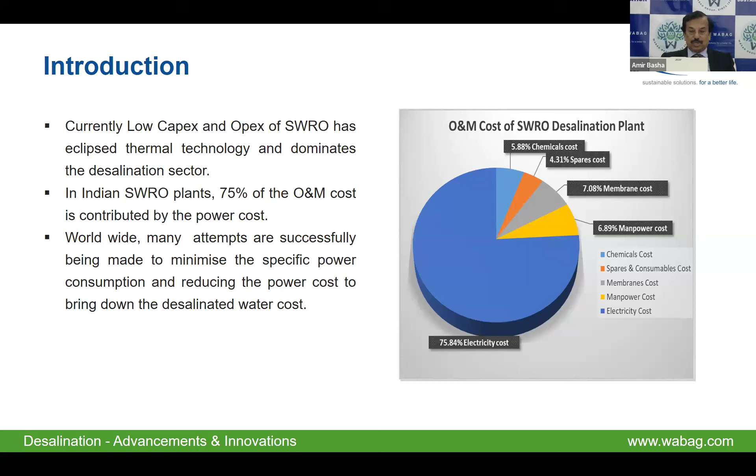In the world's largest desalination market, which I call the Gulf region, desalinated water prices have largely hovered in the range of 0.4 to 0.55 US dollars. Hassyan IWP in Dubai was awarded to the ACWA Power bidding team at a levelized water cost of 0.37 US dollars per meter cube. However, these prices are based on an RO process energy consumption of around 2 kilowatt hour per meter cube, and also the electricity cost in the Middle East is much lower than Indian power costs.

These prices are based on the RO process energy consumption of 2 kilowatt hour per meter cube. There may be some plants operating at a higher kilowatt rating depending on the type of energy recovery devices and membranes available there.

The theoretical minimum energy for desalination of seawater with a salinity of 35,000 milligrams per liter is approximately 1.07 kilowatt hour per meter cube at 50% recovery.

Nevertheless, the practical thermodynamic limit of seawater reverse osmosis in terms of specific power consumption is about 1.6 kilowatt hour per meter cube for desalting seawater of 35,000 ppm with 50% recovery. Hence, there is still a margin to squeeze the specific power consumption of the desalination process.

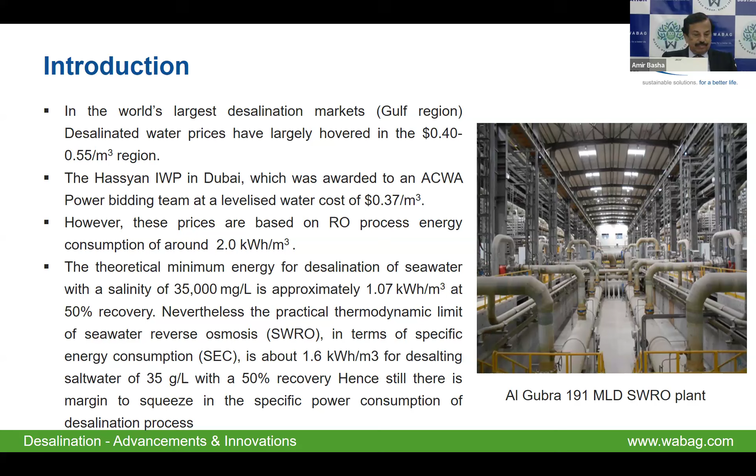There are a lot of innovative ways to reduce the energy consumption of the SWRO process. The first is improvements and developments of RO membranes. New RO membranes are being developed which will have higher flux at given pressures. Higher flux means higher flow, or higher permeate production in a given area.

So Aquaporin is developing new membranes. There are carbon nanotube membranes as well. These membranes, at a given pressure - that is, the current operating pressure - can produce more permeate. There are other research and development processes going on simultaneously at many locations.

Improvements in efficiency of all energy-consuming equipment are also being attempted simultaneously by going in for higher capacity units. Higher efficiency pumps are being brought in, along with higher efficiency energy recovery devices.

The yellow item you see here is a pressure exchanger made by ERI, Energy Recovery Inc., which has an efficiency close to 97 to 98%, compared to the Pelton wheel shown slightly above in blue, which had an efficiency of around 85 to 86%. On the right side, you can see a turbocharger with an efficiency of 88%. So there were continuous developments going on in energy recovery devices to recover the brine energy getting wasted.

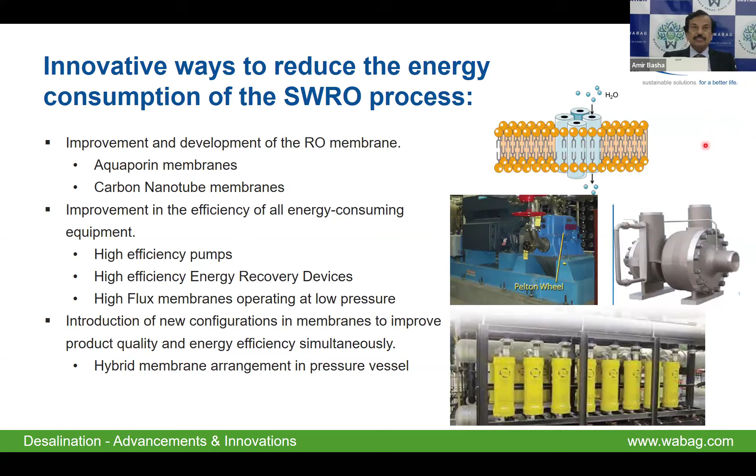Then there is the pressure center design. In normal RO plants, each RO train will have a high pressure pump, energy recovery device, a booster pump, and the membrane arrangement.

Whereas in the pressure center design, all high pressure pumps are joined together in a common place, all booster pumps are joined together at one place, and energy recovery devices are commonly placed, so that the size of the pumps is big and we can achieve an efficiency of around 90 to 91%, so that the specific power consumption can come down.

This has already been tried in some plants in Israel. And elimination of the break tank, which we call inline design, means there will not be any break tank between the pre-treatment system and the RO system. Because of that, there will not be any energy loss, which improves the specific power consumption of the plant.

Reduction of additional energy consumption by mitigating membrane fouling. In RO plants, a major problem is membrane fouling or scaling, which can increase the pressure, and because of that the power consumption will become high.

Introduction of DAF, dissolved air flotation system, biocide dosing to take care of biofouling, and use of low fouling membranes has brought down this energy consumption to a greater extent in modern plants.

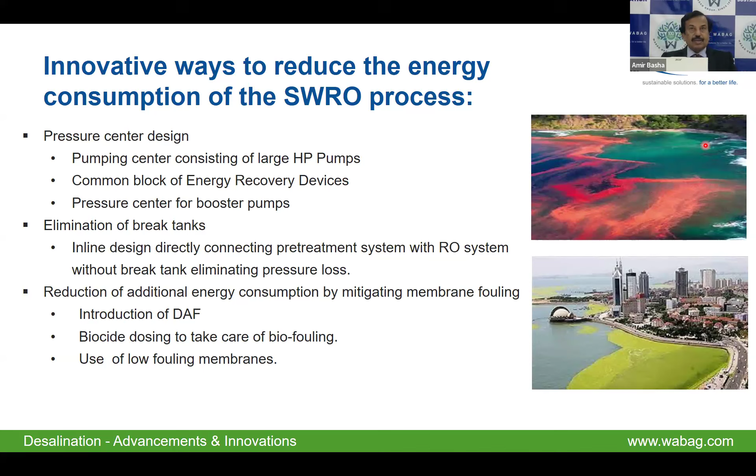Optimizing power, chemical consumption, manpower, and resource allocation with artificial intelligence and digital twinning has also considerably reduced energy consumption in RO plants.

I just wanted to bring up a breakthrough which has happened recently in desalination, a new concept. MIT scientists have discovered an astonishing phenomenon called the photomolecular effect, where light can directly cause water to evaporate without the need for heat, potentially leading to a significant increase in evaporation rates compared to traditional methods relying solely on heat. This breaks the thermodynamic barrier in thermal desalination plants. We have to wait and watch how this is going to take shape.

Then, byproducts and downstream integration with green hydrogen production, mineral mining from desal plants are also going to make SWRO plant water production costs more attractive.

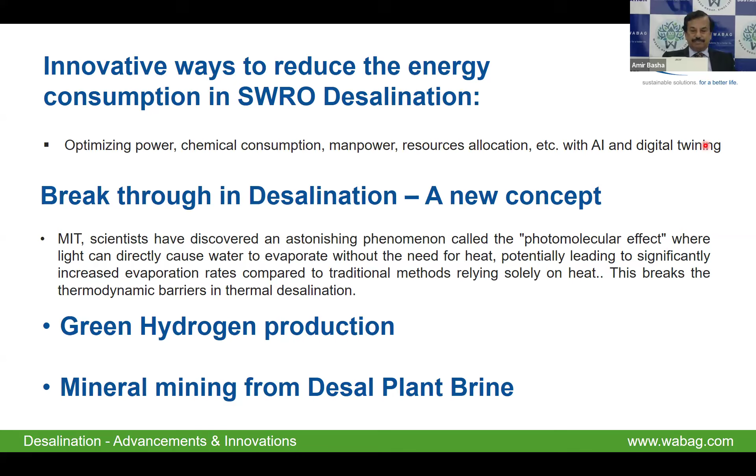Predictive maintenance with AI. AI is being used to predict equipment failures and maintenance needs in O&M projects. By analyzing historical data and real-time sensor information, AI algorithms can identify potential issues before they occur, reducing downtime and optimizing asset performance.

In these plants, reducing downtime has a great advantage, because every time the plant is shut down and started up, we have loss of energy and loss of production. So if a plant can run without any downtime, its plant load factor becomes higher and the operating cost comes down.

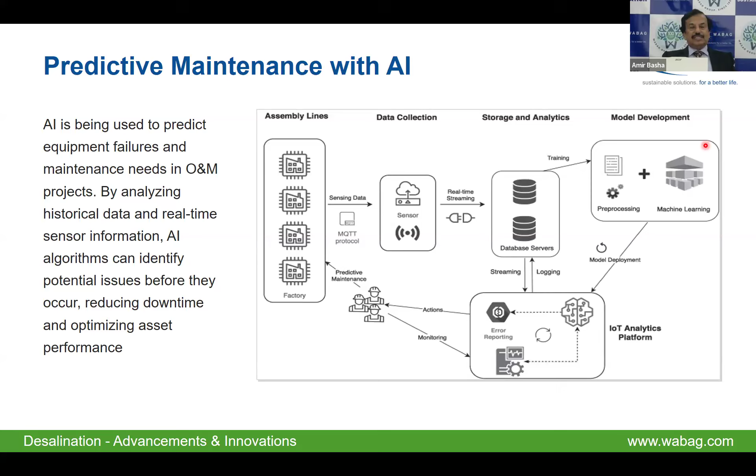Optimizing resources also by AI has given good leverage. AI-driven optimization algorithms are used to allocate resources efficiently in EPC and O&M projects. This includes workforce scheduling, equipment utilization, and material management, leading to cost saving and improving the project timeline.

So project timeline saving is also a saving in manpower cost and project cost, resulting in a lot of savings. So the capex comes down with use of AI to optimize resources.

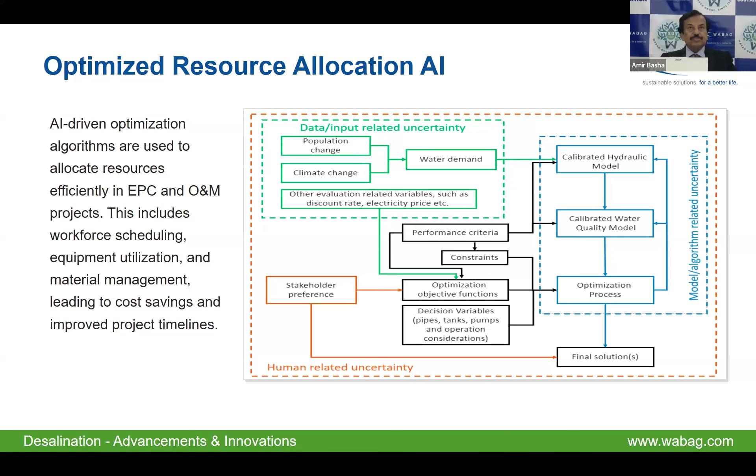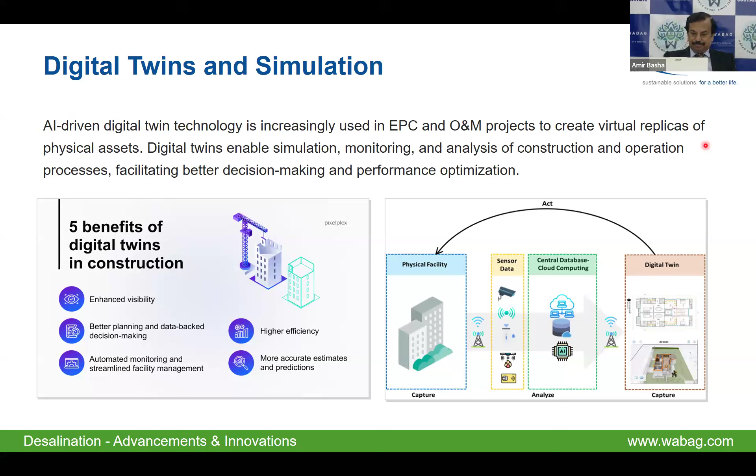Another main attempt being made is reducing energy cost. You may recall that 75% of SWRO O&M cost is in power consumption and power cost. So most desalination plants worldwide are supplied power generated from fossil fuels, and the power tariffs are very high.

So if we can go in for cheap renewable power alternatives like solar energy or wind energy, which has been successfully implemented in some desalination plants, it will drive O&M costs downward considerably by reducing the power tariff. Al Khafji in Saudi Arabia has a solar SWRO plant with a capacity of around 60,000 cubic meters per day, which is currently the largest solar desalination plant now.

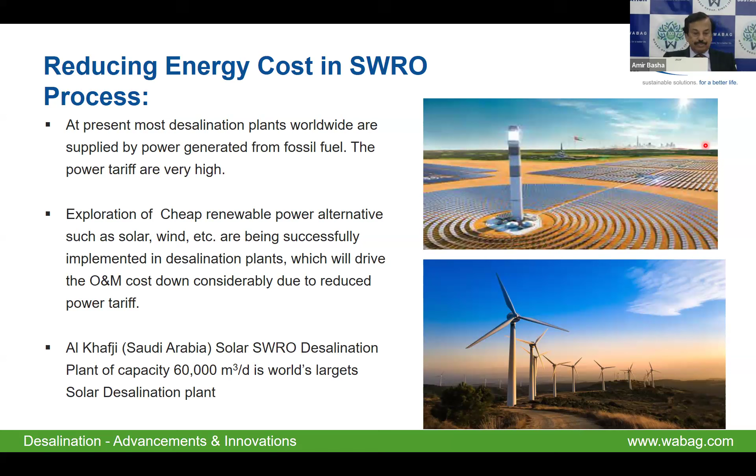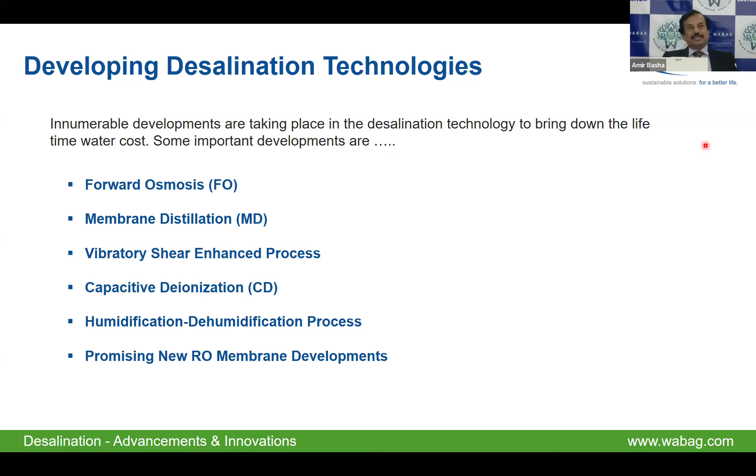Innumerable developments are taking place in desalination technology to bring down the lifetime water cost of desalination plants. Some important developments include forward osmosis, membrane distillation process, vibratory shear enhanced process, capacitive deionization process, humidification dehumidification process, and promising new RO membrane developments. Because of paucity of time, I'll explain a few of them so that some interesting features can be known to the audience.

Forward osmosis is an osmotic process. It uses a semi-permeable membrane to separate salt from water. It uses the osmotic pressure gradient instead of the hydraulic pressure gradient used in RO plants to create a driving force for water to transport through the membranes. No energy is needed to drive the water flux. In RO plants we use a pressure of around 58 to 60 bar to force water through the fine pores in the RO membranes, whereas in forward osmosis, it is driven by the osmotic pressure gradient. No extra force is required for the water, and the water flux is also higher.

It is an innovative membrane-based technology with potential to reduce the cost of the plant as well as environmental impacts in desalination. Forward osmosis is nothing but when you separate a feed and brine, due to the osmotic difference in the gradient, feed water will go towards the brine to dilute it to achieve equilibrium. So this is forward osmosis.

Whereas in reverse osmosis, you apply a force in order to have pure water molecules pass through the semi-permeable membrane and reach the other side.

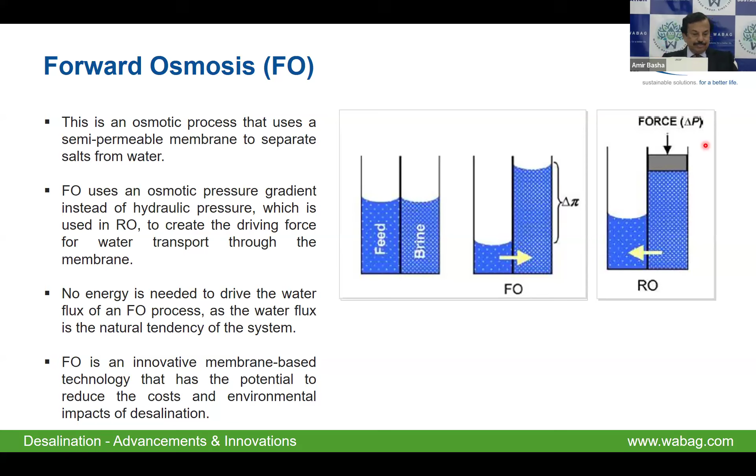In forward osmosis, a concentrated solution, called the draw solution, is the source of driving force. A selectively permeable membrane allows passage of water but rejects solute molecules and ions. The osmotic driving force in forward osmosis can be significantly greater than the hydraulic force driven in the RO process. This results in higher potential flux rates and recovery. The selection of an appropriate draw solution is a key factor in the performance.

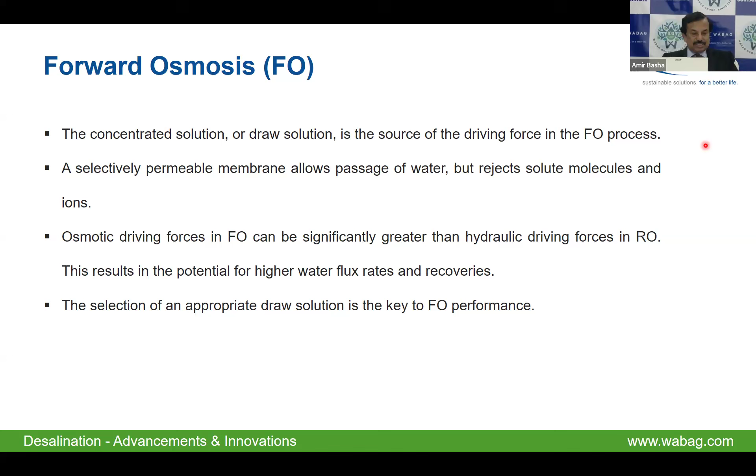The picture shows a pilot arrangement for a forward osmosis system. The blue hatched area shows the saline water entering the membranes, and the green area shows the draw solution. Because of the concentration difference, pure water molecules from the saline water pass through the membrane and dilute the draw solution. This draw solution is taken to another tank from where it is sent to a recovery system where the pure water from the draw solution is separated and taken out. So the process is very simple—it does not need any high pressure pumps to drive the process.

This process has high osmotic efficiency, and it's important that the draw solution should not be toxic, so that even trace amounts going into the produced water should not affect it and should be acceptable. The draw solution should also be chemically compatible with the membrane being used. Some draw solutions used are magnesium chloride, calcium chloride, and even sucrose can be used as a draw solution.

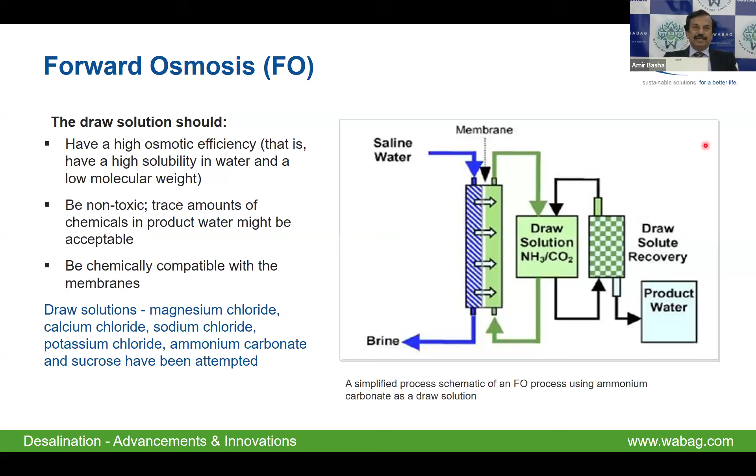Hydration Technology Innovations is a company which produces an emergency sugar drink that can be made from contaminated water simply by placing a pouch fabricated from a selective permeable membrane in the available water. The sugar solution inside the pouch has high osmotic pressure, and over time clean water flows from the contaminated side to the sugar side to produce the energy drink. Similarly, other innovations are being made using the forward osmosis process.

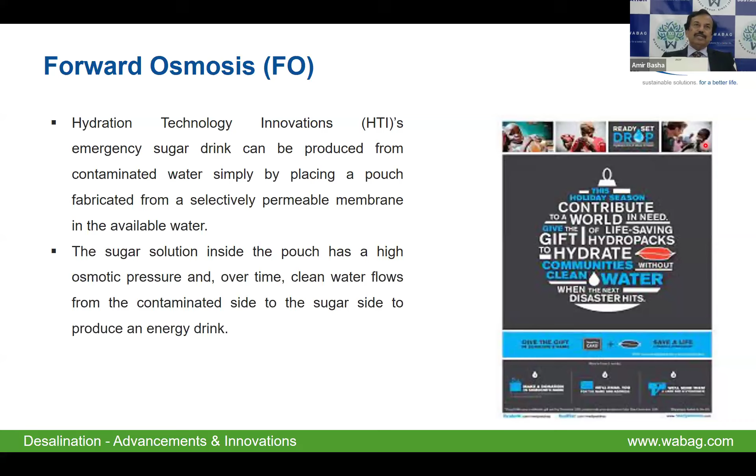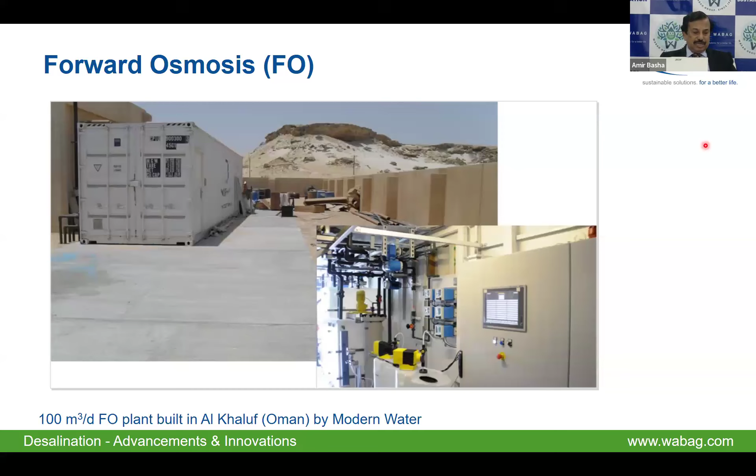One plant in Oman is a 100 meter cube per day plant, built by Modern Water. This news is 10-12 years old, where the plant was operating and producing potable water.

Comparing forward osmosis to established technology, some potential advantages: it operates around 1 atmospheric pressure compared to 60 atmospheric pressure in the reverse osmosis process. Membrane compaction is not there because the pressure is very low, and there is less fouling propensity compared to RO plants. These are the selected advantages.

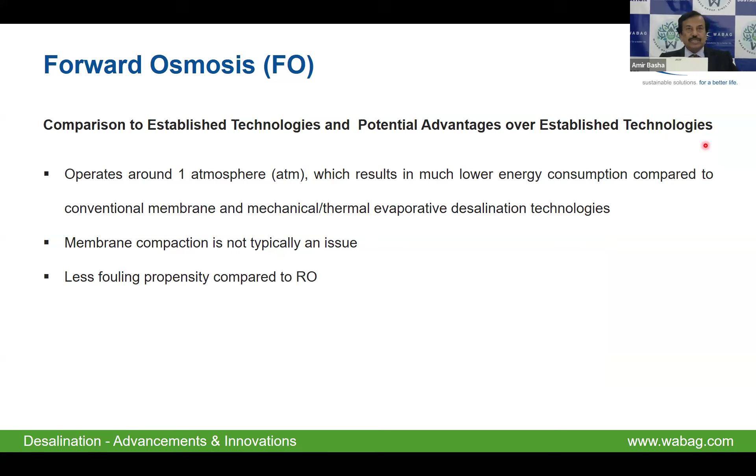But there is a limitation in the draw solution, and the following advancements need to be considered for the technology to be brought into full-scale operations: identifying an effective and economical draw solution, and a technological approach that removes the draw solution economically, since water has to be separated from it efficiently and at low cost. That is very important to make this process successful. Also, developing new and additional membrane sources is needed, because currently limited membranes are commercially available for forward osmosis—one being the cellulose triacetate membrane made by Hydronautics, which is currently being used.

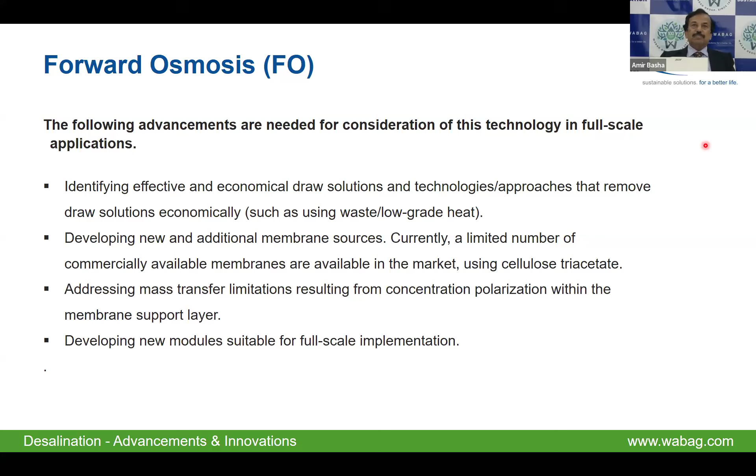Addressing mass transfer limitations resulting from concentration polarization within the membrane support layer also needs to be studied and improved. Currently there are not many new modules available, so developing new modules suitable for full scale implementation is also equally important.

The next process is membrane distillation, which is gaining a lot of importance nowadays. MD combines membrane technology and evaporation process in a single unit. The appeal of MD is that it functions at atmospheric pressure, similar to forward osmosis, and requires only low feed temperatures, 70 to 90 degrees, which is possible by means of solar energy or waste heat usage.

MD transports water vapor through pores of hydrophobic membranes. The membranes used in RO process are hydrophilic, whereas the membranes used in MD process are hydrophobic. Because of that, water does not stick to the membranes; only vapor passes through due to the temperature difference across the membranes. The membrane allows water vapor to penetrate through the hydrophobic membrane surface while repelling the liquid. The clean vapor is carried from the membrane and condensate produces pure water.

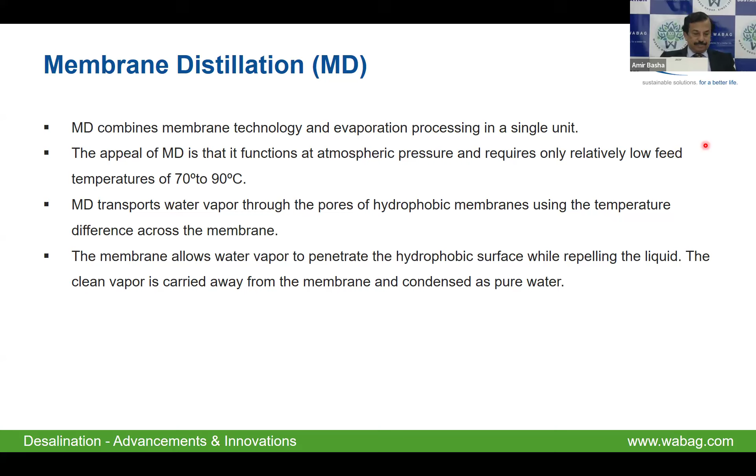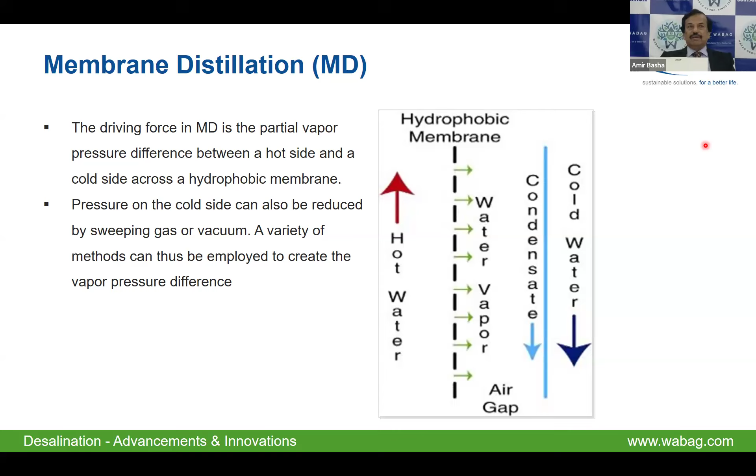This is a typical plant membrane diagram given here. Hot water flows on one side and the condensate flows on the other side, and the condensate is cooled by means of cold water. The driving force of MD is the partial vapor pressure difference between the hot side and the cold side of the hydrophobic membranes. Pressure on the cold side can be reduced by sweeping gas or vacuum arrangement. A variety of methods have already been employed and tried.

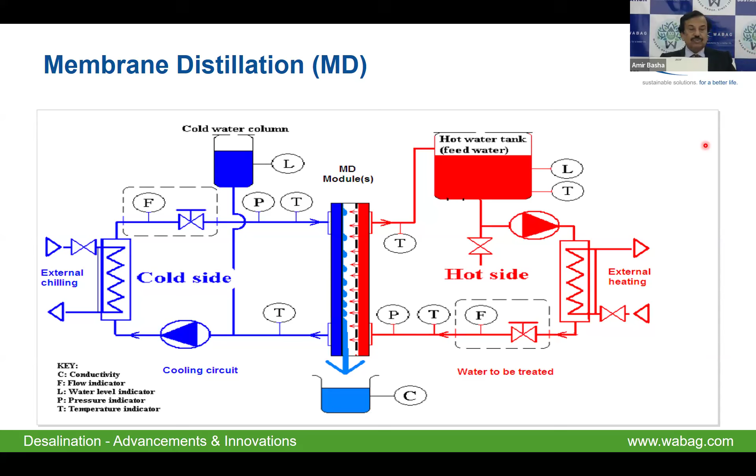The main advantage is it can be used for very high concentration also, which we can see in the next slide. This is the membrane distillation process pilot test which was conducted, and the curve shows the concentration gradually increasing. The blue line is the concentration of the feed side. You can see that it goes up to 250,000 ppm, microsiemens, whereas the bottom line, which is indicated, shows a stable, very low TDS, which was always below 100 milligrams per liter.

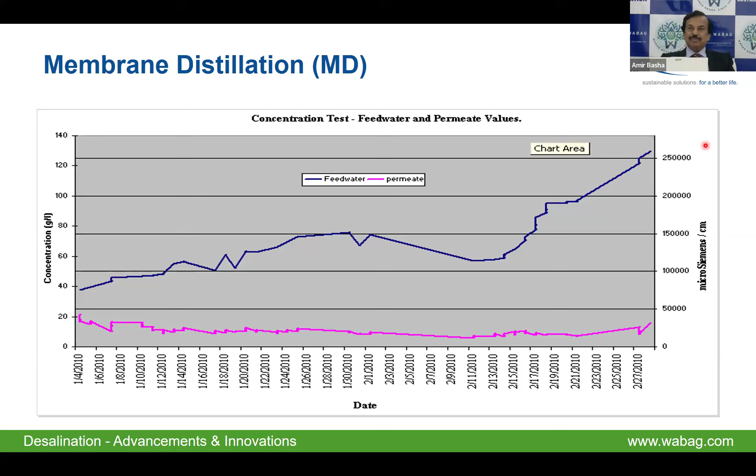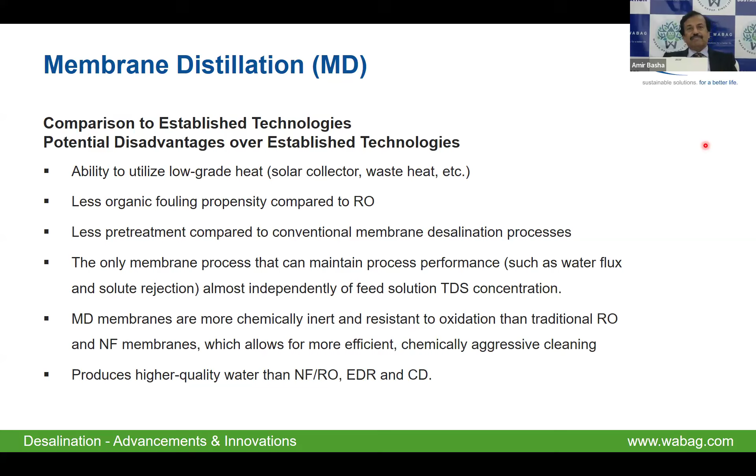MD membranes are more chemically inert and resistant to oxidation than traditional RO, because RO membranes can be easily oxidized by passing through chlorine or chlorine dioxide. Because of that, we need to be very careful, and the feed water admitted into an RO plant is dechlorinated before entering the RO membranes, whereas this is not a critical concern with the MD plant, because the membranes used are tougher. Teflon or other types of membranes are used compared to RO and NF process, and it produces higher quality water than NF, RO, and EDR or any CDI process.

It is still underdeveloped, and knowledge about the following has not been established: treatment efficiency of large scale installations and the economics of it is to be established. We need special hydrophobic membranes. Existing commercially available RO membranes are not suitable for this MD application because such membranes have relatively low product water flux, whereas for RO membranes there are several manufacturers available, like Hydranautics.

Then you have DuPont, you have Toyobo or Triflex. There are many membrane manufacturers available to supply membranes, and they can supply commercially in large quantity, whereas in the MD process we don't have such facilities.

So MD still has to go through a lot of optimization, and since we need low specific power consumption, you have to have multiple stages, which will require a larger footprint for a given equal capacity.

Contamination of distillate can occur when the membrane fouls and wets the membrane surface, because the advantage is only from hydrophobicity of the membranes. So when membranes get wet, they can pass some water molecules too. Use of multiple stages can reduce energy requirement but increases capital cost.

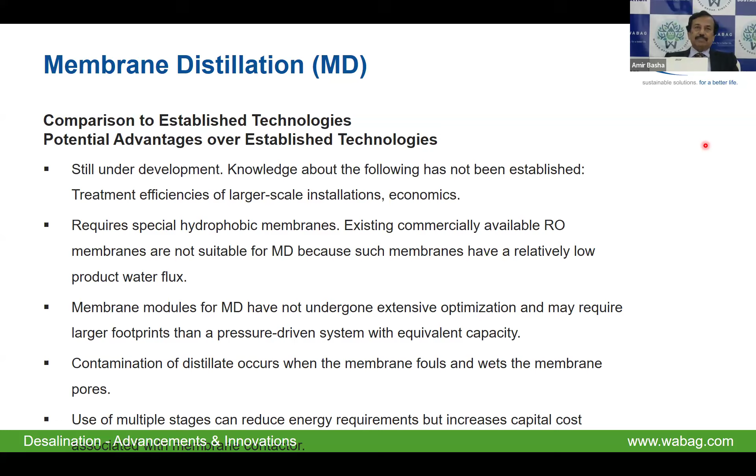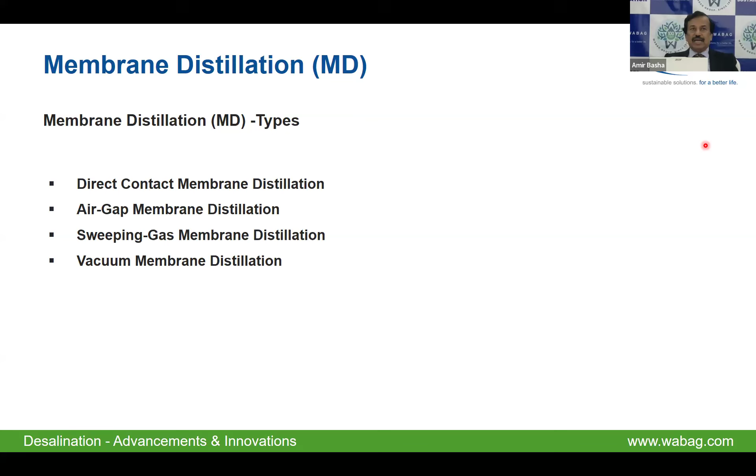There are different types of MD process: direct contact membrane distillation, air gap membrane distillation, sweeping gas membrane distillation, and vacuum membrane distillation process.

Based on forward osmosis or retarded osmosis, a membrane-based concentration process is developed. This is called osmotically assisted reverse osmosis process, in which RO brine can be taken through different stages of the OARO process, where the salinity of the water going out is reduced, and it increases the salinity of the water flowing out to concentrate it.

So brine concentration of up to 200,000 ppm can be achieved. Based on this technology, a big plant has been built in Indonesia, and it is producing salt.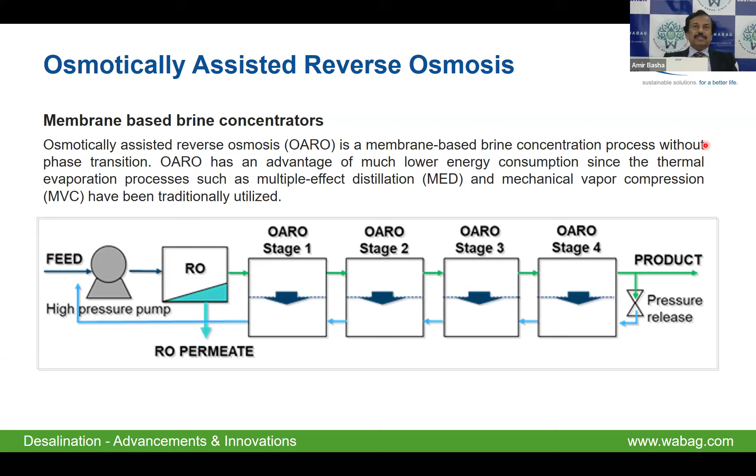So this completes my section.

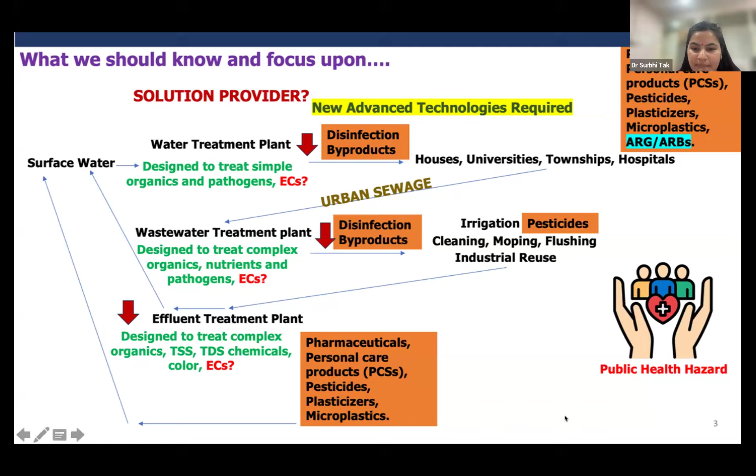So now, having said that, this is why we need to focus on such kind of technologies. I'll also briefly talk about what we already know. We know there's domestic wastewater treatment and industrial wastewater treatment, but the thing is, as per CPCB, 70% of India's sewage is untreated. That is, it is going as it is into the surface water bodies.

So when I said we are facing three sets of problems, two being the emerging problems, the first being the conventional problem, that is, 70% of India's water treatment infrastructure is yet to be made. But when I say that it is a problem, I'll also say that it is an opportunity in disguise. By that, I mean when we are going ahead with building our water infrastructure, why not include the advanced form of treatment here only, so that after 10 years we will not suffer the problem of ECs. And if the problem is only of conventional water quality parameters and not of ECs, it will actually be a very problematic state in the coming years, because it will not include ECs in our treatment systems. So that is why I said three sets of problems need to be combated here.

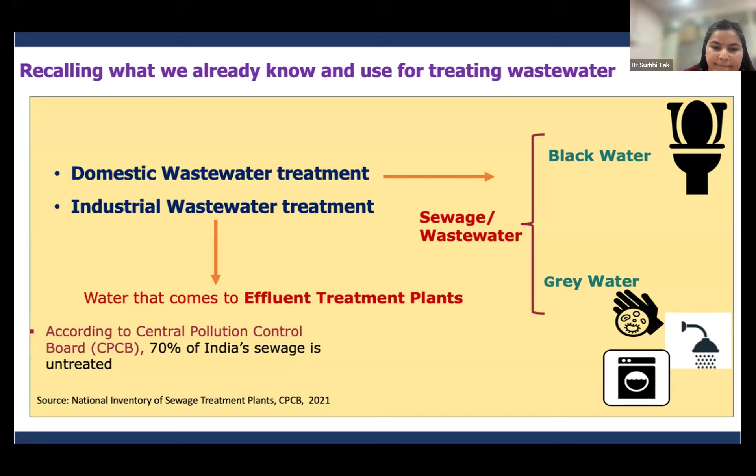So now this is the primary, secondary, tertiary form of treatment, the normal conventional wastewater treatment. My solution is, either for the 70% of the plants that are yet to be made, have an entirely new advanced oxidation based system. And if not, for existing plants, we can have them retrofitted. We can have these advanced oxidation based technologies integrated at particular stages, so that ECs will not be released into the aquatic environment. So the 30% that already exist can have retrofitting with AOPs integrated into their system, and the 70% that is yet to be built can be entirely AOP based, because these AOPs will not only treat water in terms of conventional parameters, they will focus on ECs as well. They will focus on the disinfection part as well, because AOP is in itself a disinfection method also. So that is my proposal for what I'm working upon: to have AOP as an integrated method, or as a standalone method, for the water treatment and wastewater treatment industry.

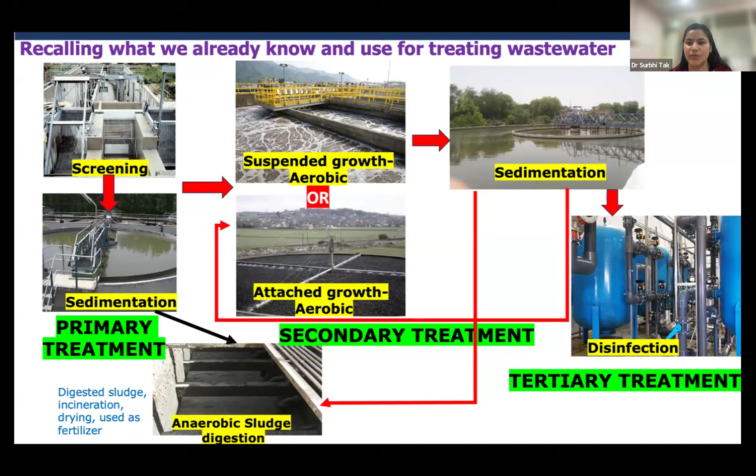So now, why advanced oxidation processes, and what actually is advanced oxidation? Any method that generates hydroxyl radicals - majorly there are ozonation based methods, hydrogen peroxide or UV hydrogen peroxide - and there are many more methods that can generate these hydroxyl radicals. Why are these hydroxyl radicals better than other forms of oxidizing agents? Because they are non-selective in nature, meaning this same technology can be used for a variety of chemical compounds that we want to target. What this AOP does, what this hydroxyl radical does, is it converts higher molecular compounds into lower molecular compounds. You can combine this advanced oxidation with other forms of treatment methods, which I have done in my research. I have combined advanced oxidation with biofiltration to make it more cost effective, and overall chemical free as well. So that is why it is advantageous over other forms of advanced treatment methods.

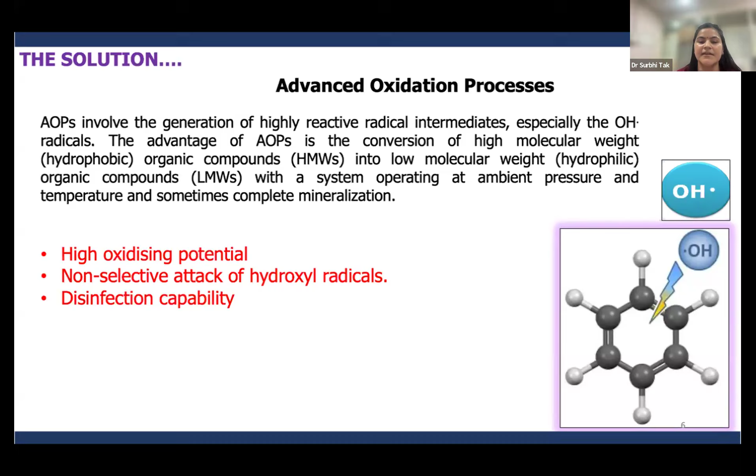So coming back to AOPs, I screened three AOPs: ozone, UV peroxide, and ozone peroxide. And I saw maximum degradation in all three AOPs.

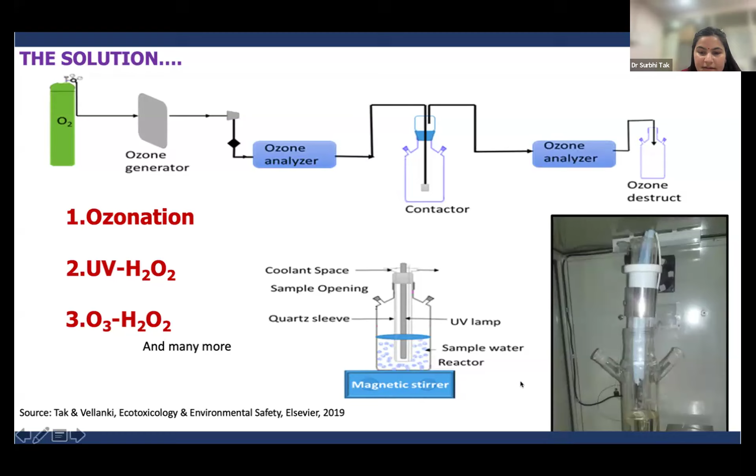This idea came later on in our study: why not combine it with biofiltration and make the cost more effective? Whenever we talk about AOPs, cost is the first factor that comes into picture, that it is costly. But if you combine it with biofiltration, it will be cost effective, cheaper than other methods used for wastewater treatment these days.

So when we screened these AOPs, UVH2O2 was the best AOP among all. It reduced hydrophobicity. Actually, all AOPs performed better, but UVH2O2 performed best in terms of THM forming potential, which was reduced up to 90% in case of UVH2O2 treatment.

Then we combined this selected AOP with the biofilter, the biological activated carbon filter. We made this biological filter from scratch, running the influent water through the granular activated carbon, which converted it into BAC. It took us around 90 days, made from scratch actually, and then we passed our AOP-treated water through this.